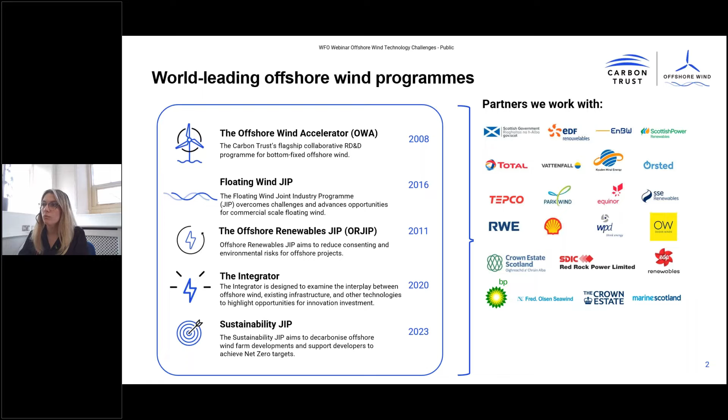So I don't want to dwell on this too much further, but go into our first project that I'm going to present you today. That was set under the Offshore Wind Accelerator. It's the DONISIS project. DONISIS stands for design of offshore monopiles, including seismic interaction with soil.

It specifically focuses on emerging markets where we find seismic activity and where seismic activity impacts the structure of offshore wind farms, the structure of turbines. The regions are getting more and more important. Countries want to unlock their potential and realize very ambitious climate targets.

But in order for them to do so, we need to make sure that we establish a design for offshore wind turbine support structures that takes these seismic interactions into account and really close knowledge gaps on the seismic response of the turbines towards the impact during earthquakes or tsunamis as well. Also identify, evaluate more how monopile design drivers are impacted.

We want to take into consideration what we expect in terms of pore pressure effects, and just develop practical tools that could be used by the industry, by developers for their design, site design in new markets. So it really was the motivation to develop a de-risked, more resilient monopile design.

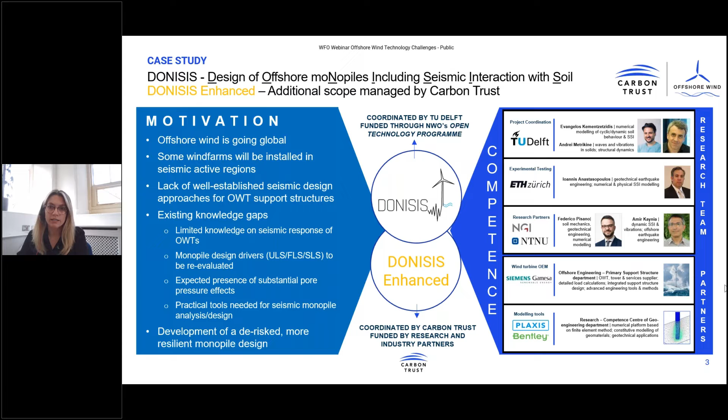So quite a lot of knowledge, and the project is structured in what we've referred to as the CO.PH.FE.E. modeling approach. The first work package is focusing on the constitutive modeling, predominantly performed by TU Delft and a geotechnical consultant, Great Geo. And the physical modeling in work package 2 is conducted by ETH Zurich. As I mentioned before, they have just inaugurated their large centrifuge last year, and we are able to perform large-scale shaking tests there. Then in work package 3, consolidating FE modeling, near and far field, and in work package 4, the engineering modeling itself.

So we really try to realize a lot of benefits here. We want to reduce uncertainty, mitigate risk, improve knowledge and understanding of the impact of seismic loading on offshore structures, but also, in terms of commercial benefits, it's always important for the Carbon Trust to keep that developer lens and business case in mind, really develop advanced methodologies for monopile design, avoid over-conservatism that can be very costly when you look at multi-gigawatt developments, and also reduce liabilities when it comes to actual incidents in the water.

So we want to develop industry best practice tools that can be practically applied, and therefore we also engage certification bodies in the project. We work with Bureau Veritas, DNV, and NCREE, the Taiwanese Research Institute, that bring their unique market experience and try our best in this way to increase the acceptance of certifiers as well and support the dissemination of the results across APAC and also the west coast of the US.

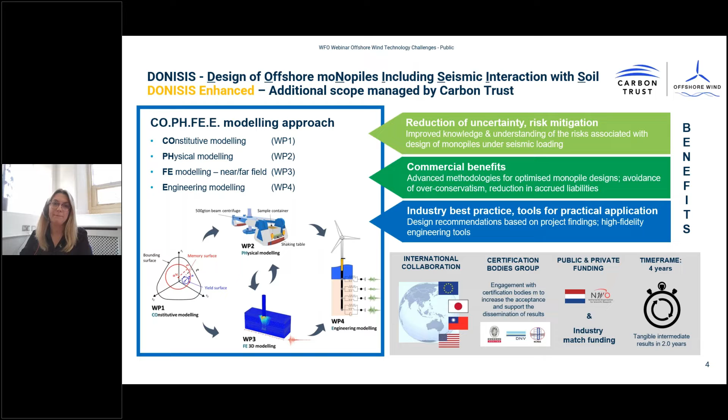I'm going to hand over to Bethany now to talk about another initiative that we are currently realizing.

Okay, so we'll now move on to discussing a key challenge around cables. So this is related to soil thermal properties, as you can see from the title. So in relation to inter-array cable and export cable design, thermal properties of soil are critical to making those designs, but there's a lack of clear guidance around conducting tests and interpreting results of tests, which is often leading to conservative cable design choices, and in return that leads to potential cost overruns for projects.

So in order to address this challenge area, within the Offshore Wind Accelerator's Cables Technical Working Group, we recently completed a project called Soil Thermal Properties, which is looking to address this uncertainty.

So the way we went about this was to investigate the methodologies for measuring thermal properties of soils, looking at IEC standards and also fundamental physical laws. We also looked at enabling increased accuracy of measurements and assessing implications for subsea cable design.

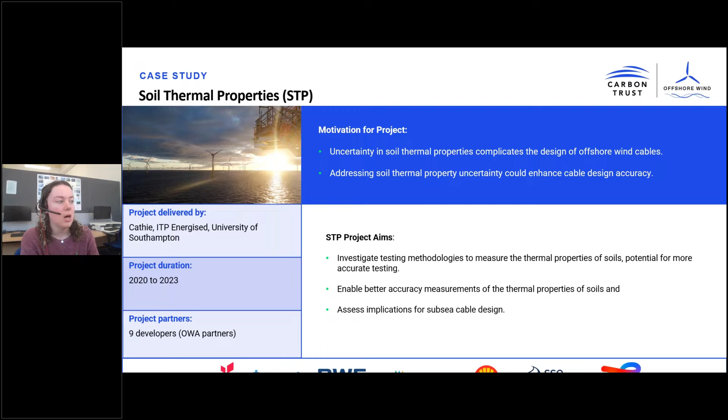You can see the project was delivered by Cathie, ITP Energised, and University of Southampton. This was done in collaboration with the 9 offshore wind developers in the OWA, and was conducted over 3 years. So you can see on the slide the outcomes of the project.

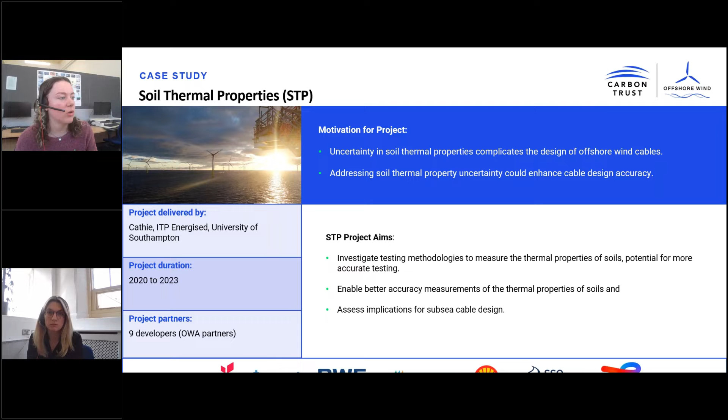Okay, so where did we go up to? So we established a basis for determining appropriate characteristic values to be used in the design, and we also recommended improvements to the measurement techniques and interpretation of results for offshore use.

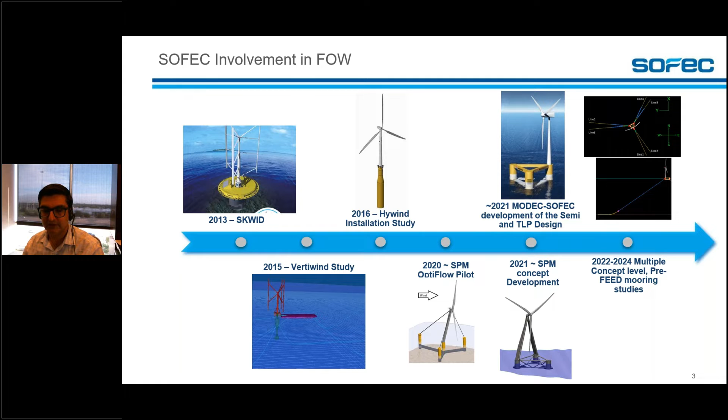For obvious reasons, we have worked on pilot projects for our single point mooring designs, and we have our own concept as well. But since 2021, with our parent company Modec, we have focused on development of the semi and TLP designs, and also done quite a few studies for mooring analysis at different phases, from pilot programs all the way to the farm level, as a mooring designer. So that's where our focus is, to stay with our core experience as a mooring supplier for the floating platforms.

Before I start getting a little bit maybe negative and talk about challenges, I have to start with this: this is a very exciting time to be a mooring engineer. And I say that as someone that has been part of this industry for the past 10, 15 years.

What was asked from us mooring engineers in most of the oil and gas projects was a robust design, no new technology, everything was standard, and you tend to just go through the motions and design a system that is very robust and, let's say, just fits the purpose of the project.

But now you see the shift, and it's a good shift for a mooring engineer, especially if you're in new technology development, that we actually have a very large portion of the cost and also the scope of a floating wind project, and that has opened up the door for a lot of innovative designs. If you just search online, you see V-shaped mooring, shared legs that were never studied or looked at, and there are new materials being studied.

I think the last time we actually introduced a permanent mooring component to floating platforms in oil and gas was 1995, when Petrobras started using polyester. But now we're talking about nylon as a long-term mooring, load reduction devices. There are new pile designs coming up, and they all have some interesting merits. There are new installation philosophies.

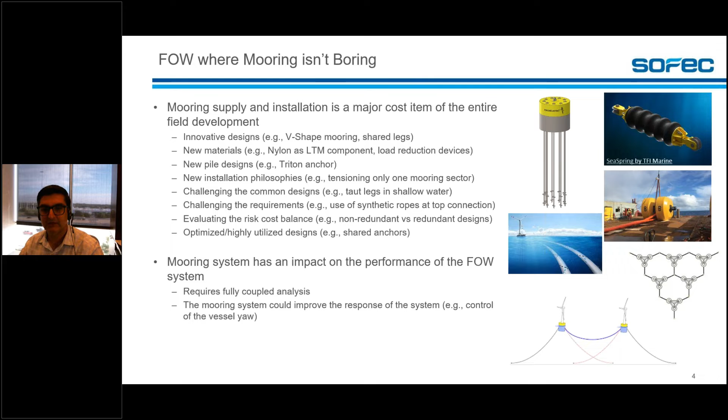Like most people, when we started looking at floating wind and the mooring design, we focused on the challenges with the individual floater. That was kind of natural. We started working on the concepts and the pilots. And the biggest change for us was the wind load modeling compared to what we had on, let's say, oil and gas platforms. There are still a lot of uncertainties about the wind load. We still have challenges on how to model the wind turbine correctly at the early stages of the design, but that has been the focus, and I'm not going to get into that a lot.

There are a large number of load cases, and a lot of them are new, and something that we actually learned and relearned again is that there are multiple governing conditions. Coming from oil and gas, you usually start with extreme analysis, and then it works out that the other cases are not as critical.

But you can actually see on floating wind, there are going to be multiple operational or extreme cases that could actually govern the design, and you cannot relax, let's say, the load case or load matrix too much. And what we have actually learned is that fatigue could be the governing case for a lot of our designs, especially if you're using a chain segment that does have its issues with fatigue.

These are very dynamic systems, relatively small, and we are looking at harsh environments. Obviously, you're looking at places with good wind, which also comes with good wave, and that is also causing a lot of challenges. A lot of the sites that we are looking at are shallow waters, and any mooring engineer knows the shallow water effects: nonlinear behavior of the wave, the wave kinematics are different, and also the geometry of the system is going to be very constraining.

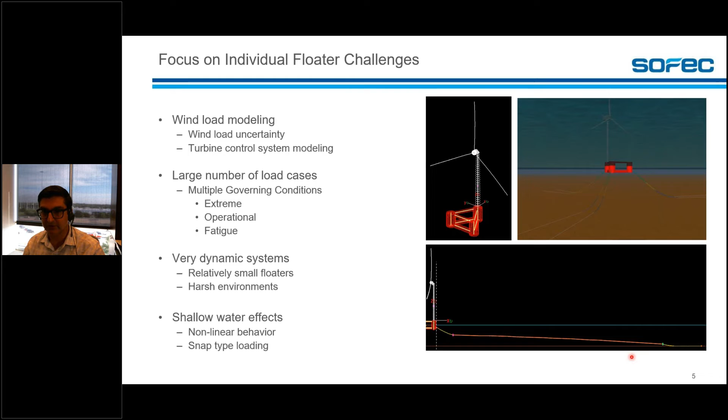But for the past year or so, we have participated in proposals, pre-FEED or studies for farm level mooring systems. And something that we saw right at the start, a challenge that we had to tackle, was the water depth variation. It sounds simple. Obviously, you're looking at sites that are closer to the shoreline, so you are still in the slope part of the ocean.

Typical sites that we have looked at have water depth variation somewhere between 75 to 250 meters, but we also have looked at extreme cases between 100 to 500 meters on a larger wind farm. And the typical approach, partly because of the way the scope was defined, and partly because we were a little bit naive perhaps, is that you start to design for an average water depth.

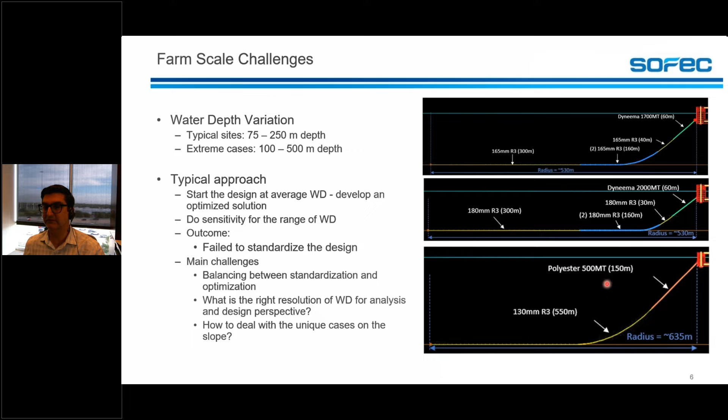So the challenge that we have right now, and we see it on pretty much every study that we have done so far, and even the more serious RFQ processes, is what is the balance between standardization and optimization? Do you design for the shallowest water, which is going to be the more critical, and then apply the same components over the entire range? Or do you come up with a balance, or cut the field into certain water depths? That's still a debate.

And also, what is the right resolution of water depth for analysis? Because you are going to see in the next slide that some of these fields have a really sharp drop of the slope and the depth, and how do you actually manage that when you're looking at different water depths?

One of the bigger challenges that we have, and this is related to what I mentioned before, is that there are going to be a lot of unique cases in the field, where you're going to be on the slope and mooring legs are going to be sitting at different water depths. And how many of those unique cases do you need to consider to, A, get class certification or class design approval, and B, make sure that you have looked at all the combinations that could impact the floater and also the turbine design? So that's the balance that is very interesting.

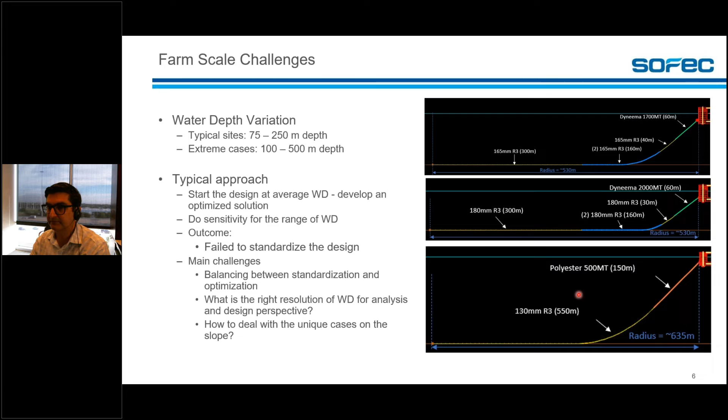Another major challenge that we are still figuring out, and I think we are not unique in that sense, is that the site size and variability in the soil characteristics is quite challenging and very difficult to manage, especially at the early stages of the design. If you look at these kind of water depths, let's say 250 meters, a typical FPSO has a pile radius or mooring radius of about 1 kilometer. That's the area that you need to consider for your geotechnical.

And we still see variability. We still see impact in the design of the pile between different clusters, especially if you're on the slope and you can have different composition of the soil. You have to consider exclusion zones, which could impact your mooring arrangement, and we have more flexibility there.

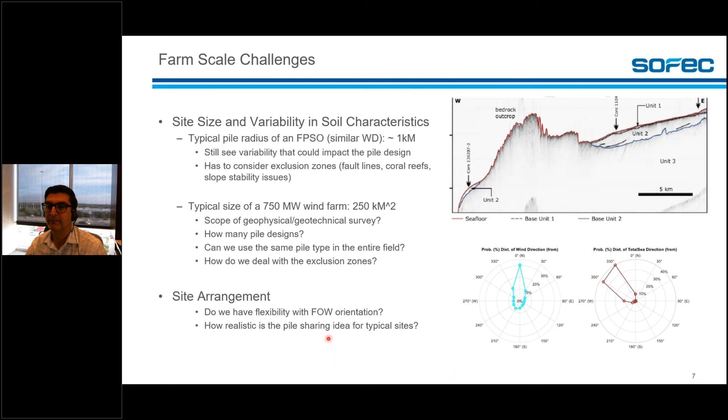Something that we have actually tried, and I think on many occasions we have failed, the whole idea of pile sharing is quite intriguing. It's very interesting. It makes a lot of sense. But when you consider all the slope restrictions and all the design performance requirements and everything, it seems a little bit constraining. And is it really realistic for a typical site to be able to manage the radiuses and the lengths and arrangement all perfectly, that you get a honeycomb shape that we typically see?

On my final note, and that is a little bit of what I would call a pet peeve. We get invited into studies. We also look at studies that are done by others. Usually, when you start a field development, there's a lot of focus on the floater design. That's where the majority of the inputs are available. The mooring becomes an afterthought, or typically what happens is that you actually go with limited information on the geotechnical and the site conditions. So you make a lot of assumptions.

And there's this phrase that drives me at least crazy, that we say that this issue or this challenge or this data is lacking, so we actually have to do it in the detailed design. And then when you look at the detailed design, I did not touch anything on the supply chain issues, on the component supply, on the shipping and everything. Though that is really where the focus needs to be. You have a design that is relatively mature and move on into the execution.

But we see that sometimes, I call it like a bodybuilder that forgot the leg day. So the floater itself is very well developed and the design is relatively mature, but the mooring part, because of, let's say, the uniqueness of each site, is not mature enough.

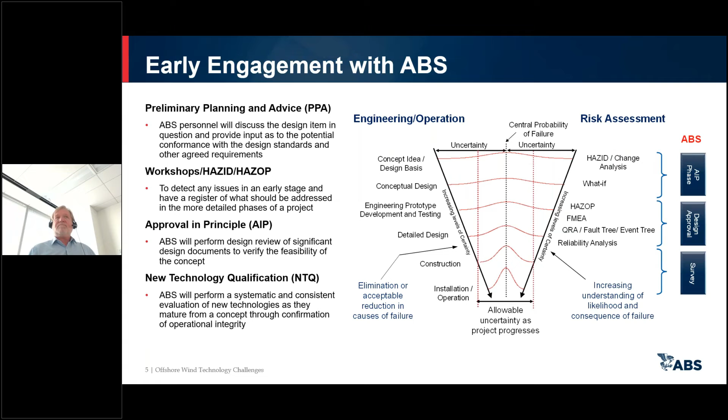I'm trying to speed up here because I see we're running a little bit out of time. Just want to mention we have a guide for floating wind turbine, basically addressing everything below the tower flange. And we have a guidance note just updated to include guidance on integrated load analysis. And those are the key and the main difference between what we are commonly used to from oil and gas into wind.

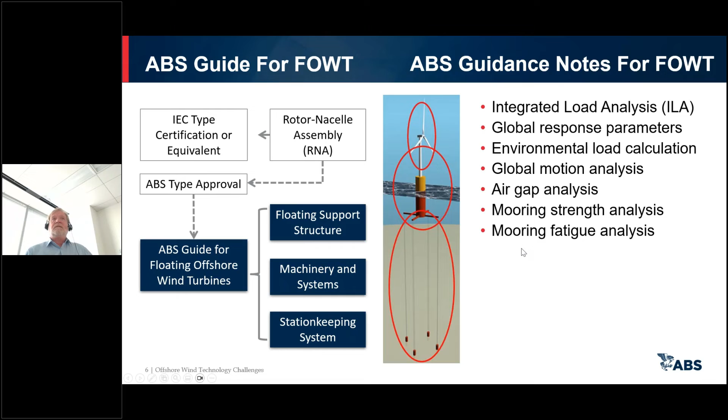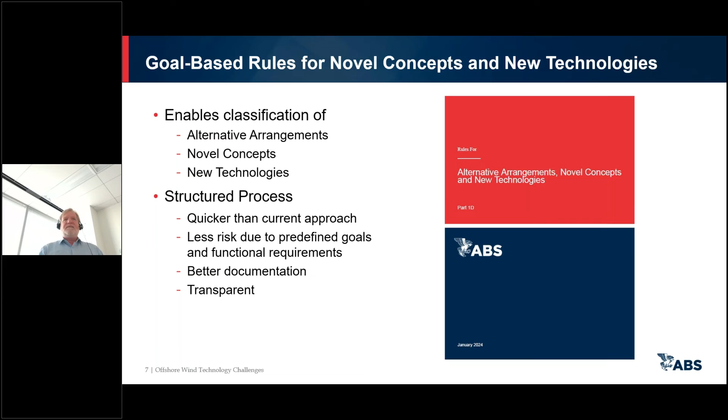And another thing we haven't spoken about here is, in the end, you will need insurance and you will need bankability, and it doesn't hurt to engage them early on in the process either, to increase their confidence level. For example, what we did for the Windfloat 1, we were the independent third party, but EDP, which was the Portuguese electrical company, were heavily involved in all of these risk workshops, hazards, etc., to understand the risk they were taking and increase their comfort level.

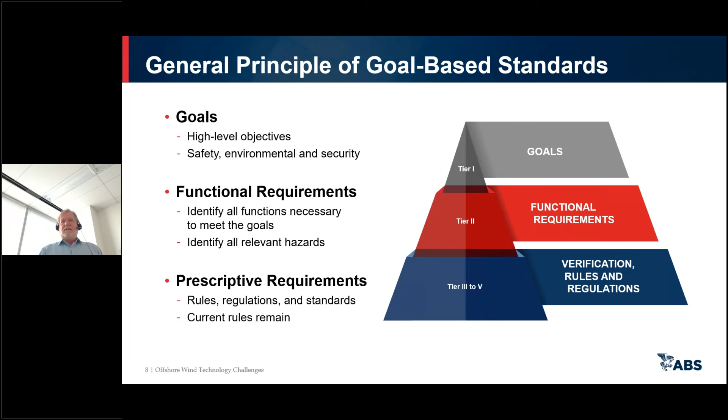So the goals, as you see, the high level objective is the goals. We focus on safety, environment, security, and bankability is sort of a result of those three, I would say. Then functional requirements and what is addressed already and what is applicable from the prescriptive rules, for example, from that ABS guide I mentioned, or from IEC-3-2. So we narrow down, we know the path we're going, and we can focus on the unknowns.

And looking at the necessity of this, this Quest database, right now we have 145 concepts, and per their definition, they find 65 of them being not mature, 15 front runners, and then we have 4 proven floating foundations. I think we all know which they are.

And as I said, for the items not addressed by the prescriptive rules, use a goal-based approach, address it early on, no matter how small the piece is, because no chain is stronger than the weakest link. So you need to have a good understanding of where the risks are and what are the mitigations early on in the project. And these tools I talked about earlier are good tools to utilize in this process.